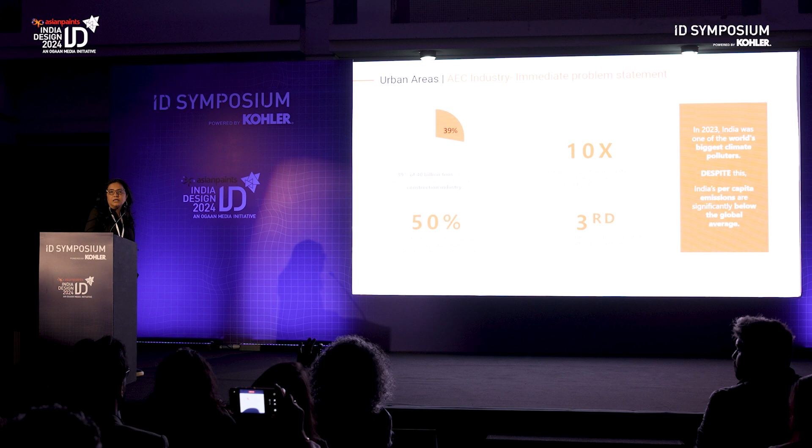For me, these things formed the thoughts that I've been having: what am I going to do with myself in the next 10 years? What is my role? So far, the role has been, and us in the construction industry have largely contributed to it, taking the global temperature post-industrialization up by 1 degree centigrade, where probably at 1.5 we'll all be devastated. And essentially, we talk about achieving net zero, but where are we? Where are we in this net zero conversation?

We all talk about energy intensity, that's embodied energy within the products we use. We talk about energy efficiency, but where are we? This is something for the last 10 years that I've been working on within the firm: sustainability, optimization, unique and livable. But really, given the enormity of the task in the 10 years to come, this is nothing. This is absolutely nothing.

So some of the things that in the last 2-3 years, especially since COVID, I've been talking about is energy which is metrics driven, not just to go one step ahead, but to actually prove to ourselves that we are heading to net zero. And talking about social inclusivity and sustainability, but is that enough?

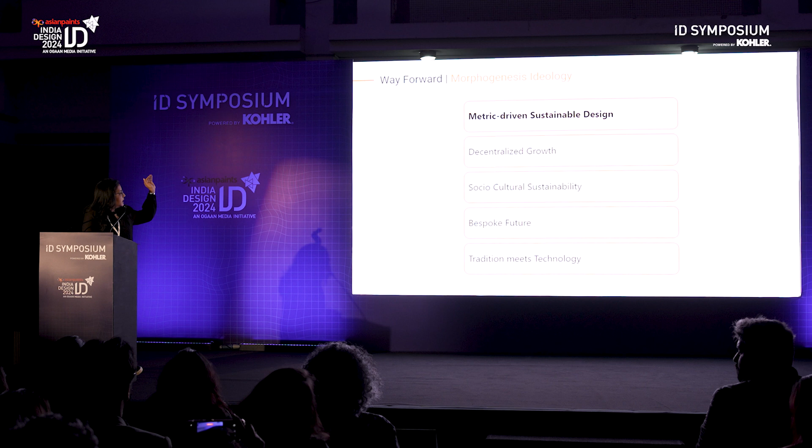So I want to talk about how I went into my own past, looked at 5 projects where I've practiced some of this, and I want to form, like I formed along with various people, the philosophy SOUL, which I worked on over these two decades: sustainability, optimization, unique and livable. Now, I don't as yet have an acronym, but I want to introduce to friends, colleagues, professors in the audience that this, I think, is the basis of the next 10 years for me. And this is the first time I'm going to talk about it. So the first is metric-driven sustainable design.

So I was fortunate to build this project, which is the world's largest office building during COVID. And in conversation with Amit again two weeks ago, I realized that if I could build 142 such buildings, then the entire building target of India for the next 10 years is done.

If one practice with about 16 architects could build a building using 50% of the energy that the best green targets allow for, of course 50% is also not good enough, it should be net zero. But if one practice can do this, just this room full of people can build all of India in a more sustainable way.

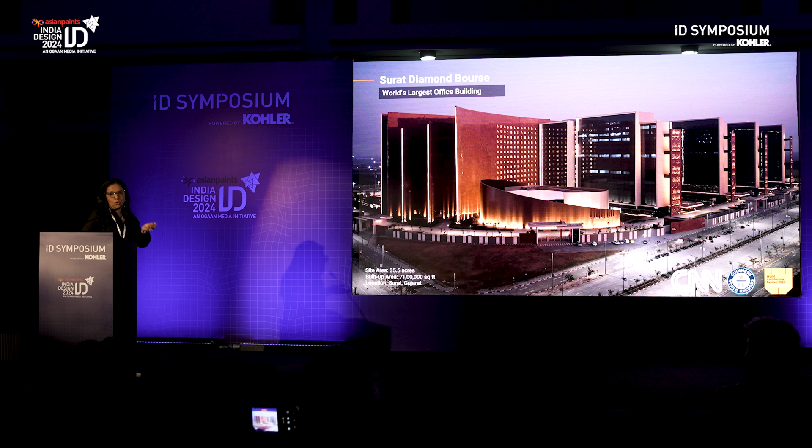So this project taught me about metrics-driven design because the budgets were so tight and the entire money was in the bank before the project started, and the vision was larger than life. We'd been working in the field of reducing energy, but we really had to reduce energy to actually meet the cost, leave alone a grand idea of going to net zero.

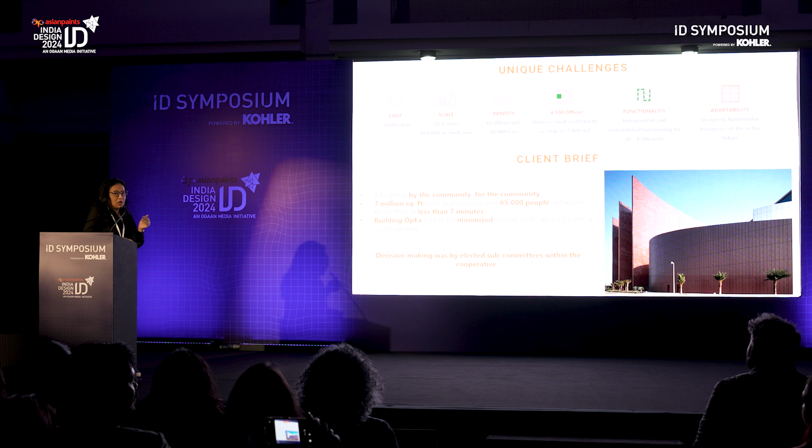But the building was not buildable if certain metrics were not achieved. This building is for 65,000 people who come into work every day. So all sorts of savings, including saving of human energy, which is calculating how 65,000 people get into a building every day in the first 15 minutes between 9 and 9:15.

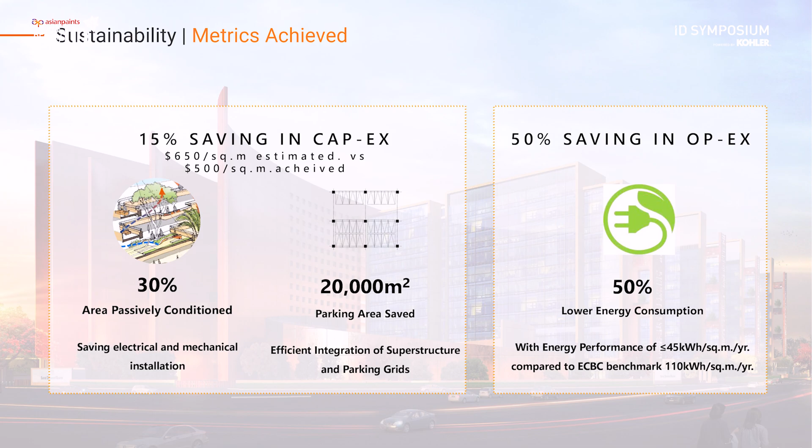And the only way to build this project was 15% saving in capital expenditure and 50% saving in operational expenditure. So energy performance was 45 kilowatt hour per square meter per year. That's what we achieved. This is less than 50% of the green standards which would be acceptable.

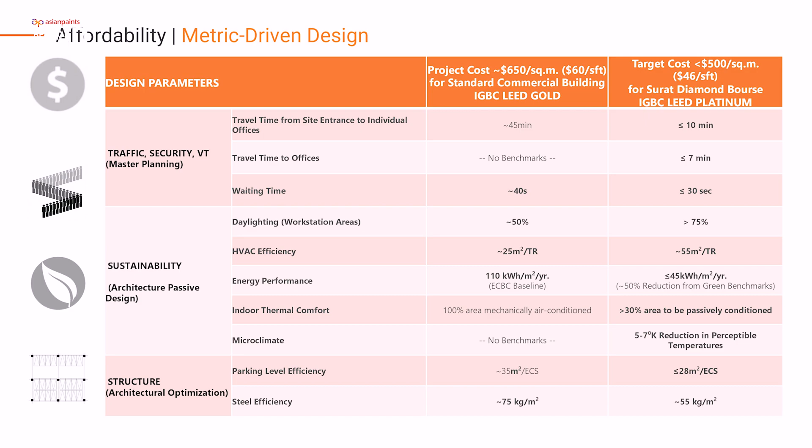So examining LEED Gold, which was the client mandate, examining LEED Platinum, even with that we would never achieve the cost of the project, so we had to go beyond that. So numbers were what helped us. Why I say metric-driven design? The numbers were decided first, the design came later.

And as the next decade is going to be about net zero, zero is a number. So I have reversed my design philosophy. It is number first. It's going to sound horrible, so don't just read it for just this one sentence that I'm going to say: for me, it's going to be a decade of number first, design follows.

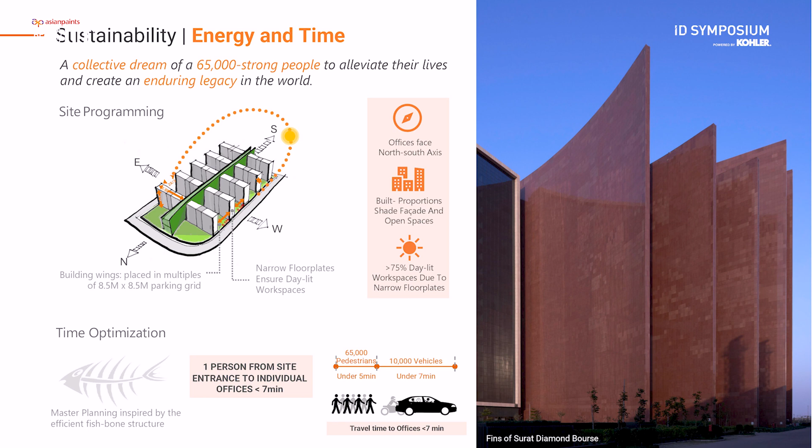So this was a collective dream of 65,000 strong people to alleviate their lives and create an enduring legacy for themselves in the world. And this is the project, and this project was designed numbers first.

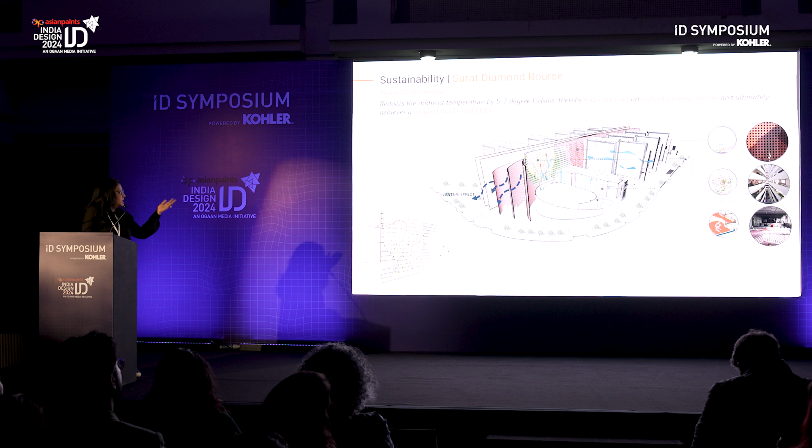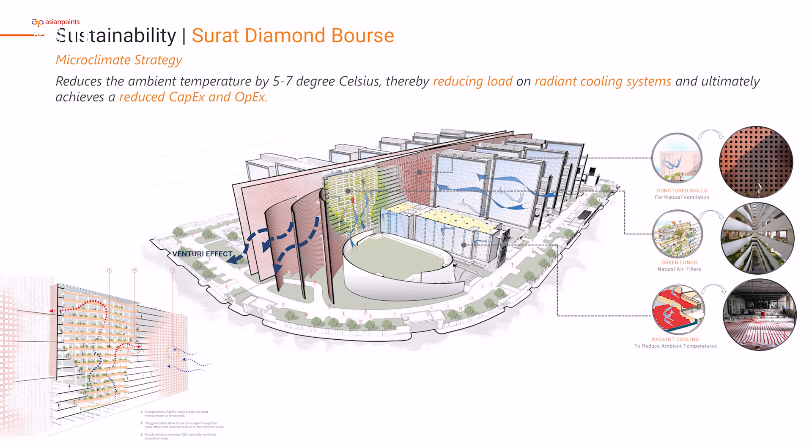Of course, the elementary principles of sustainability that we all studied through Koenigsberger in second year, and have developed over almost 3 decades of practice, all of those stay. So it's not that aesthetics disappears, passive design disappears, none of that disappears, but that by now is given. If I don't know that in 3 decades of practice, then too bad, that's really sad.

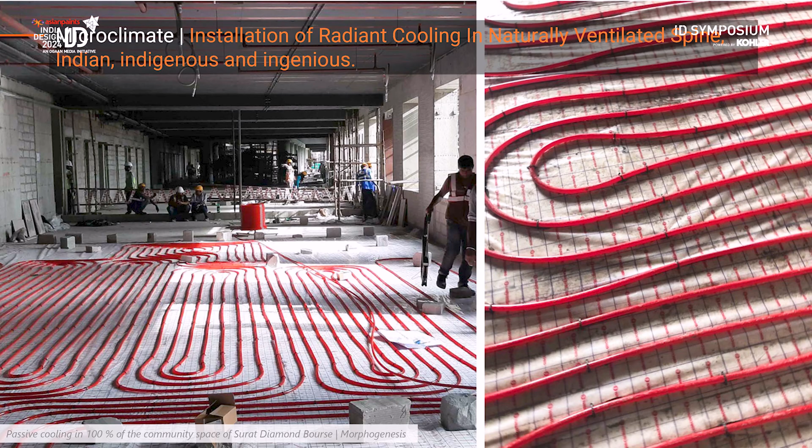So the new idea is numbers-driven design. So this is where innovation came in. It's Indian, it's indigenous, and it's ingenious, working together with the engineers.

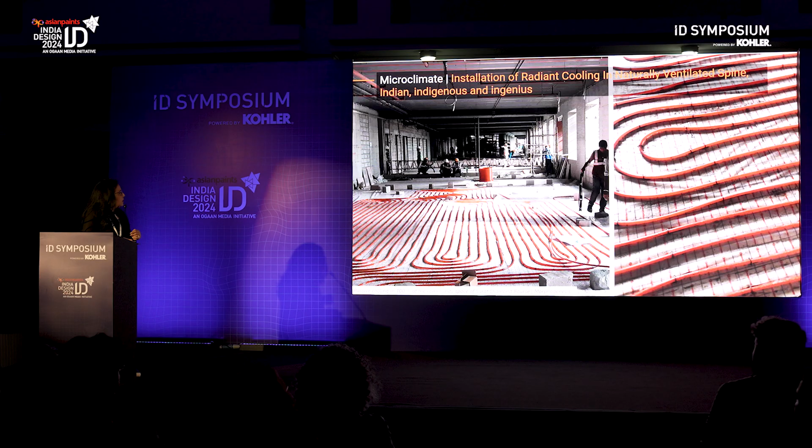Radiant cooling, so in such a large project, 42% of area, I think, is in circulation, and none of it is air-conditioned. All of it is radiant cooled. Radiant cooling had been introduced in Germany about 6-7 years ago, but very expensive to do here, till we made it here on site.

So these holes in the building, Jaali inspired, so reminding you, not forgetting design and not forgetting heritage. Jaali inspired, so the entire building is ventilated. None of these holes have any glass in it.

And when designing buildings to this scale, there's no corridors, they're only urban spaces. So this is internal urban spaces, internal gardens, internal spaces for people to move. This is the primary circulation of the project.

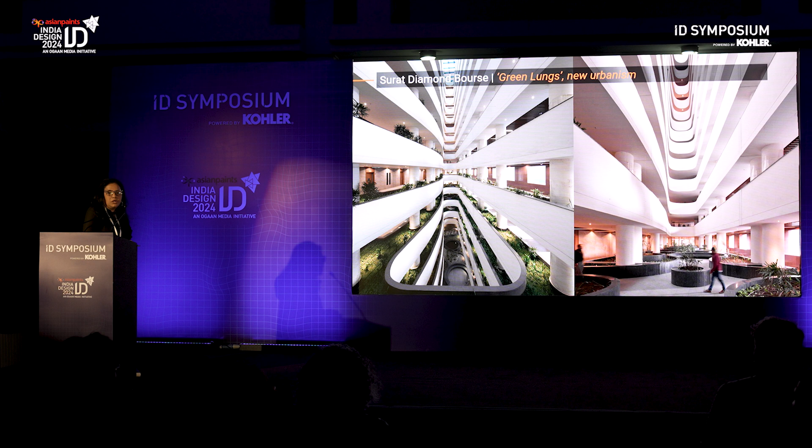The project as it stands finished and was inaugurated in December, a couple of months ago. Just some images to give you a sense of scale.

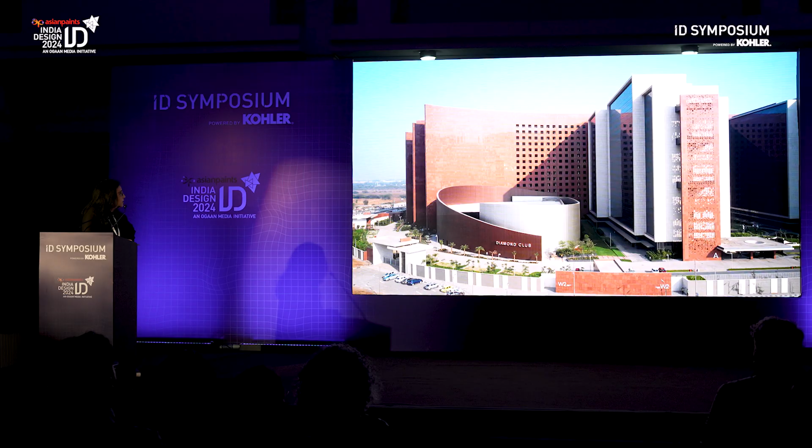Okay, now I go to a really small project. This idea happened again by building a building during COVID that never stopped construction because it was in the middle of a hill, or rather on top of a little hill that no one was bothered about. Had about 60 or 80 huts on the village, that's about it.

So this is the entire production facility for Forest Essentials. Most of us use some product or the other from there. And this building is completely off-grid and was built during COVID.

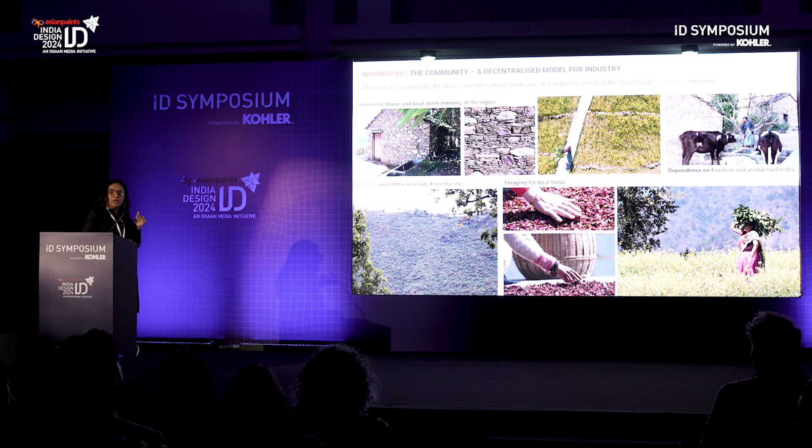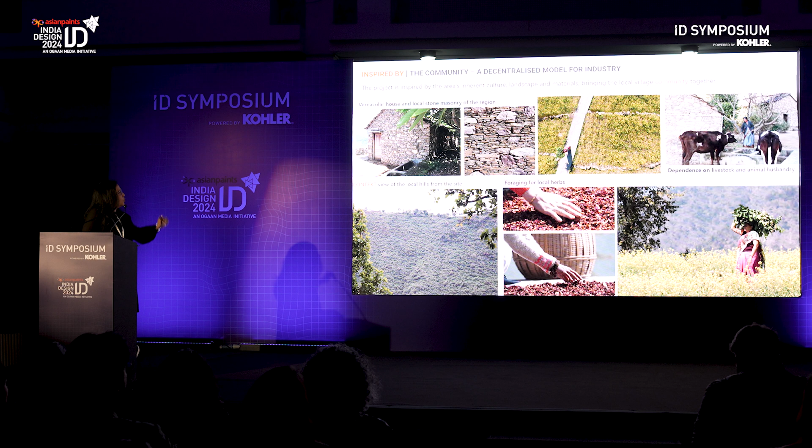What got me thinking was that this building never stopped being built, because when the few laborers who were there disappeared, people from the villages built it instead, since most of them had employment in this factory in some form, direct or indirect. We used local dhaji-style stonework so that they could build it.

Then I realized that if a very successful company can continue operations in an off-grid building and get it built by just the people around, people who seriously walk to work, then maybe we need to question the idea of the urbanization figures I've just shared. Why doesn't work just happen? Why don't we come up with a more decentralized urban plan? I know in India it's mostly policymakers who do that, but this is a conversation I've been having with myself.

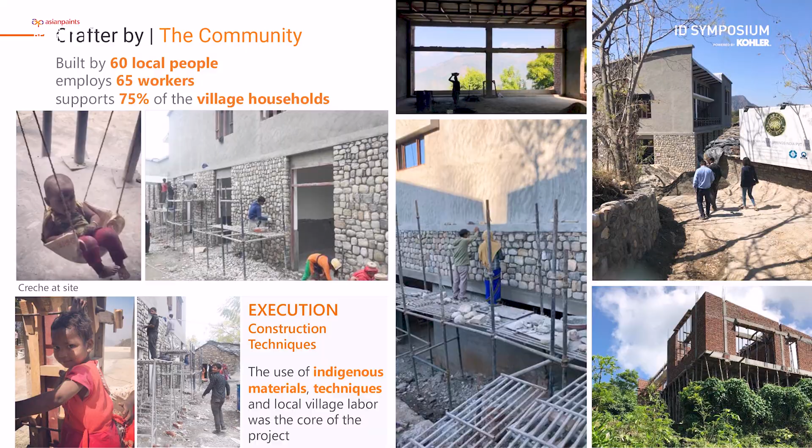So it's an energy-positive building, just using solar panels. It also gets used as a school in the evening because it's energy positive, and in the day it does production. In the evening, because a lot of the huts don't have the same conditions to study, many of them study here. Indigenous materials and techniques are used, and 100% of the products sold in 80 countries can be produced in this condition. Because they're invested in by a major international brand, Estee Lauder, all the conditions required for international ratings of this kind of product are met here.

So it is really a building for the people, by the people, and built by the people, and on this hill of Lodzi, every household has somebody who comes here to work, directly or indirectly. This is my next preoccupation, or will be for the next decade: decentralized growth. If such successful companies can happen this way, then why not a lot more?

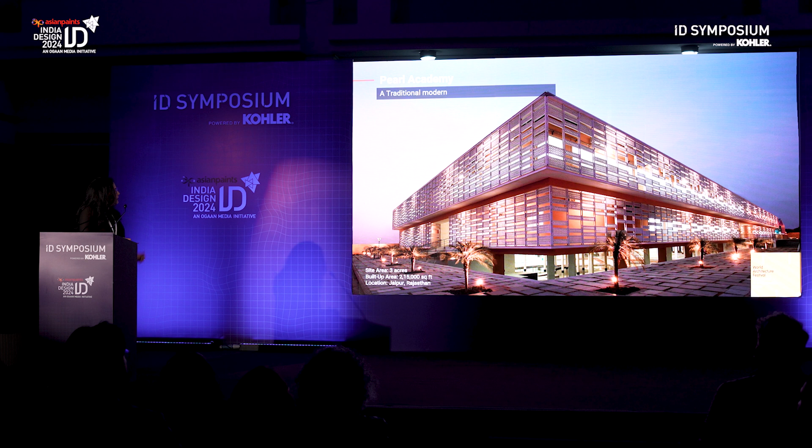Third, socio-cultural sustainability is my next conversation. This started in 2008 with a project called Pearl Academy of Fashion, built outside Jaipur. This conversation happened again because of a lack of budget, so every little technique that could save money was looked at. I think Shruti, sitting here in the audience in the front row, worked on this project.

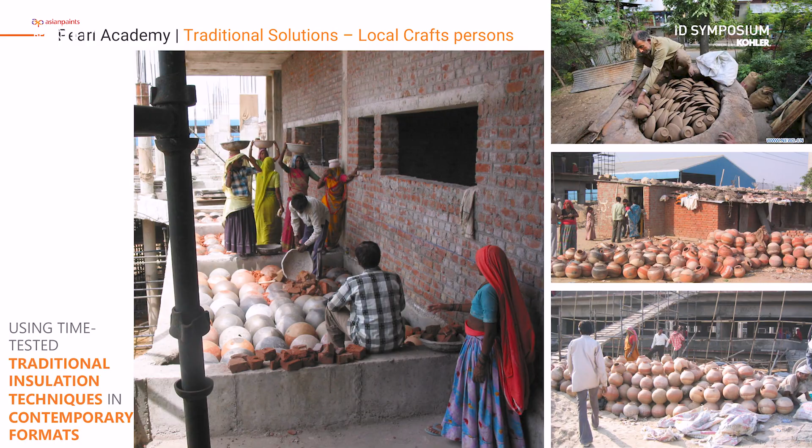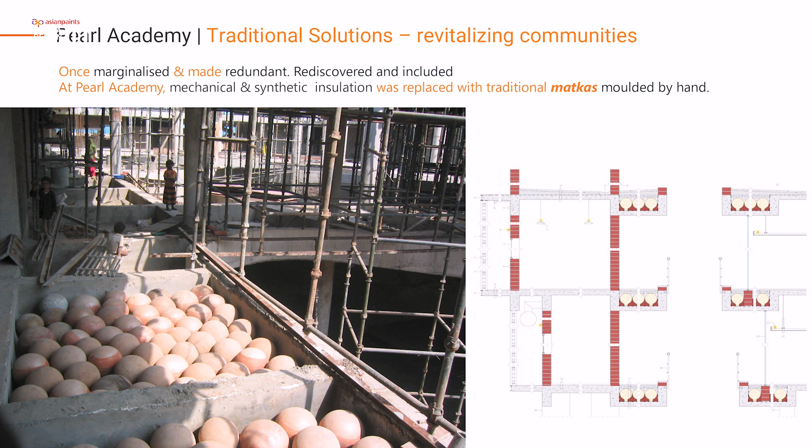So this involved potters making pots, using them for insulation and also to create flat soffits by inverting the beam and filling it up with these pots. You can see the detail, and you can see the work in progress.

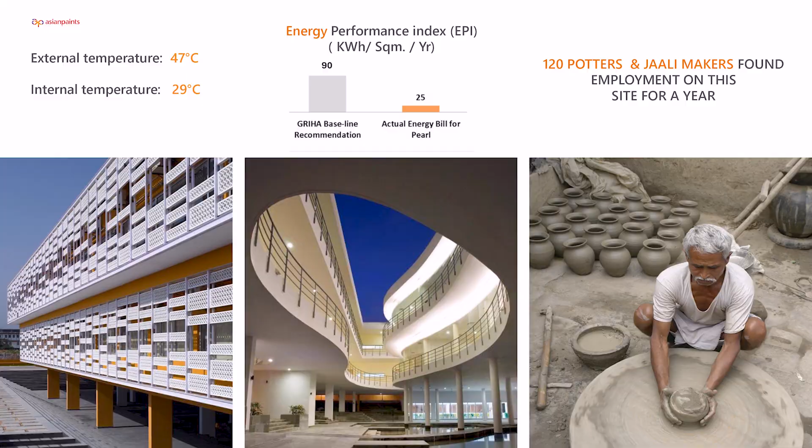A few years later, I called the client back and asked about that little colony of potters we set up, how many were there. That's the kind of rough information I got. I believe now they go from site to site using the same technique a lot in other institutional buildings in Jaipur. So this was a Rajasthani technique: forgotten, rediscovered, and repopularized.

And it's cheap and effective: 30 rupees per square foot became 1 rupee 25 paisa per square foot. So for me, it's about the cost of building and it's about inclusivity, because we are going to be shifting all these people from rural areas to cities in the next 10 years. Some part of what they bring has to be brought into what is being built. Otherwise, there will be a mind-numbing amount of zero-skill people around us if we rob them of every skill they have.

So this is an old project, but the conversation became alive for me more recently about the people who helped with this. Earlier, it was always about the architecture, the jali, the matka, but now it's about the people. Because all these people who are going to move into the cities, we need to find ways in our architecture to enrich the architecture using their skill, not to do social service.

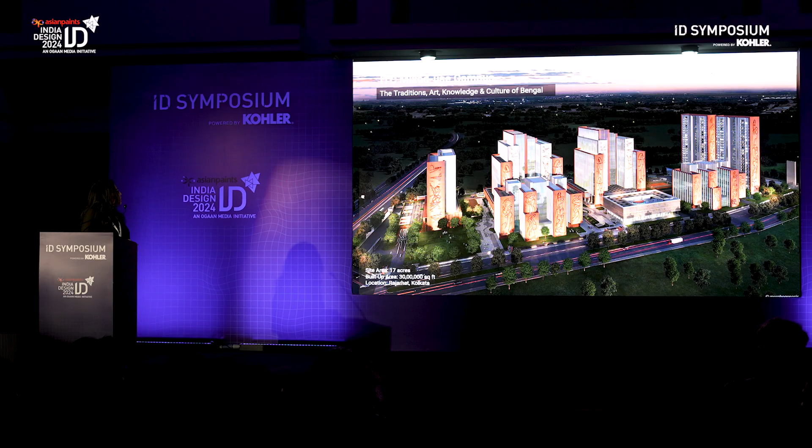Fourth, for lack of a better word, I'm calling it bespoke future. I'm sure over the next few conversations it will improve the taxonomy I'm using. So this is a project called the ITC Mixed Use Campus; now they call it Sanskriti Campus. This is half built, outside Kolkata. This was a west-facing facade, so as per passive design principles, it had to be a blank facade. So in ideation, it became blank canvases.

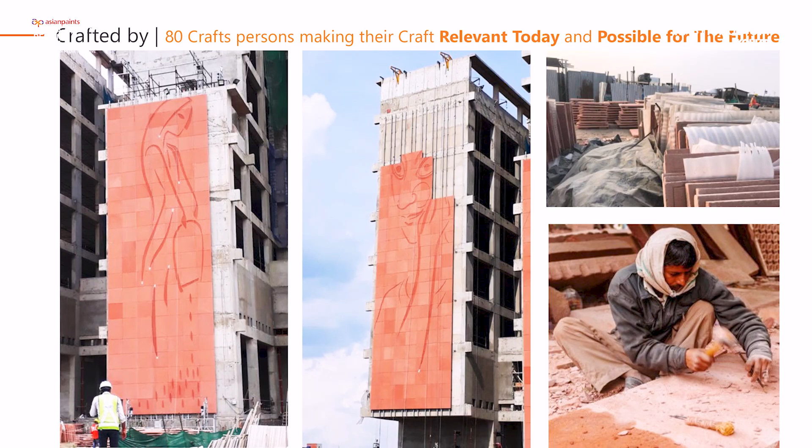And this is the project in construction. So this is where 80 craftspersons, their craft is being made relevant today and possible for the future.

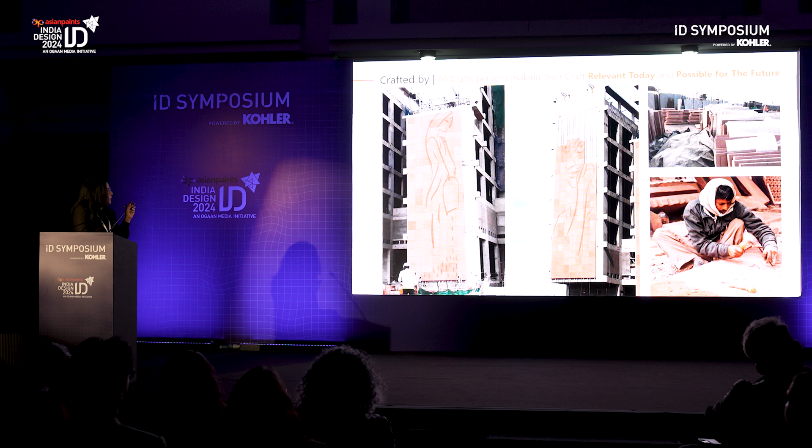It's being made relevant because certain very tedious tasks, which cost labor, are labor intensive and become very expensive, time intensive, and therefore not possible because we are not in the business of making Taj Mahal today. So half and half, let's share the burden. The craft is made relevant today, but the base cutting, the first cut, happens with CNC, and the style of cladding happens with drywalling. And the fine art on it, the depth, the color, the resin filling, the texturization happens by hand.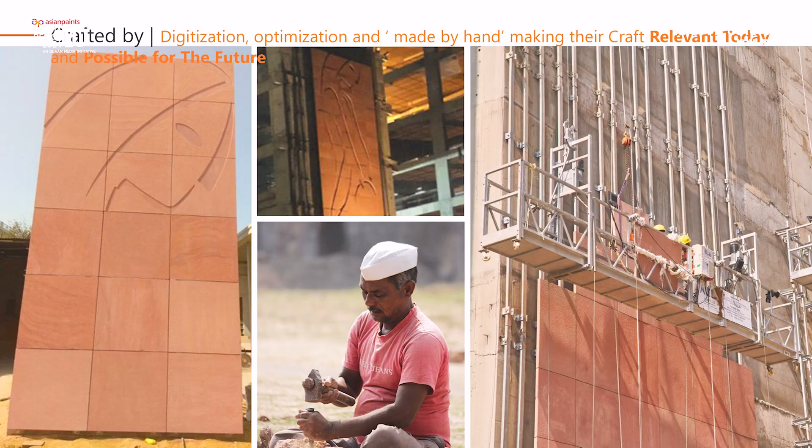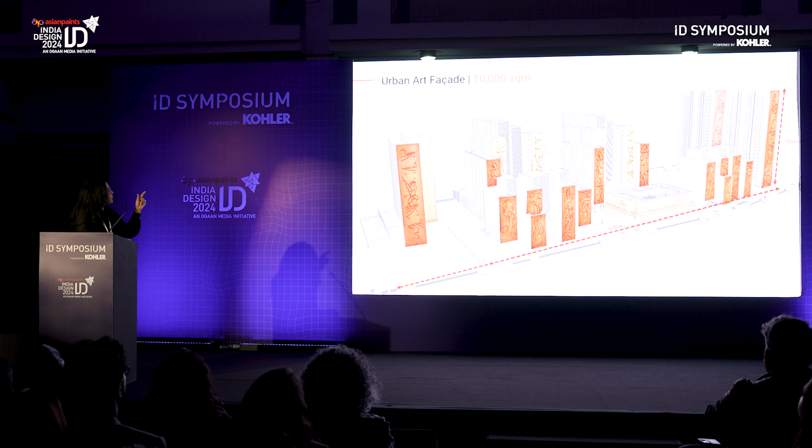About the first 3 buildings are done, but that's what it will be finally when that happens. There will be 28 facades, the maximum being 95 meters tall, showcasing works of artists who were paid to draw up designs, and have stayed employed for the last 5 years because they build very slowly in Kolkata, and it will probably keep them employed for at least another 5.

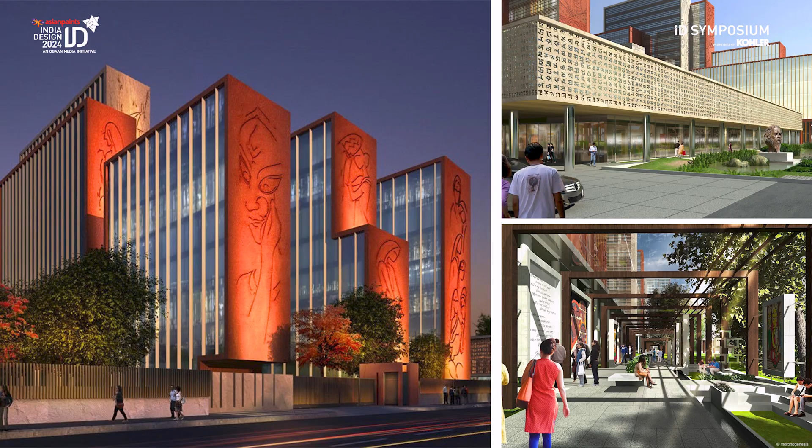And the last, tradition meets technology. This was a project finished just 2 or 3 months before COVID hit us. It's the corporate office for Zydus. Again, I think west-facing projects give you a lot of opportunity for sculptural work. So this is west-facing on the highway, and obviously, you blank it out if you can, and that's what we did. We tried to create this fortress which won't let the sun in.

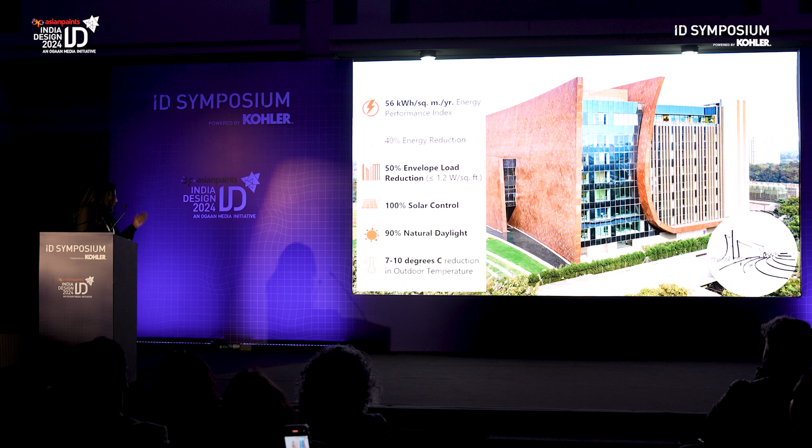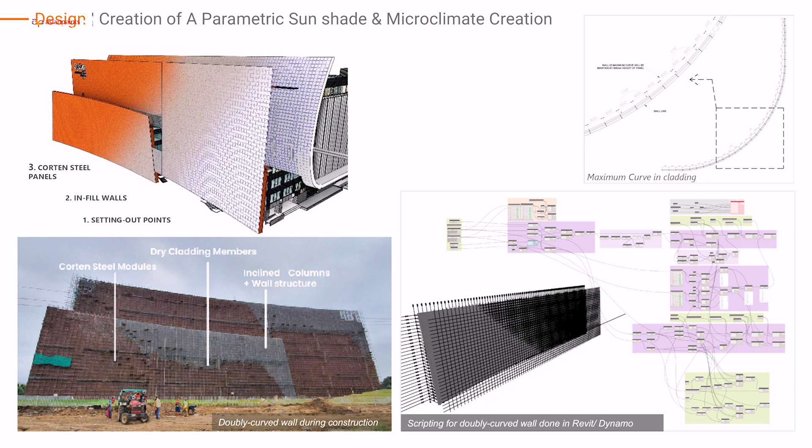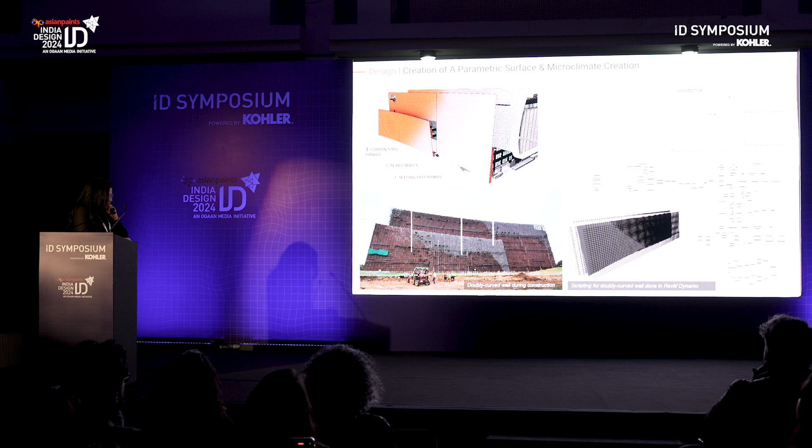By doing that, all the energy metrics, which today have gained more importance in my being, so a lot of reduction of energy intake into the building was already done through that process. But I think what is very exciting about this surface is some parametric software work done by some very cool young architects. This kind of doubly curving, multiply curving shape, with 1,700 different points, was created. Whilst it was digitally created, how to build it was another thing altogether.

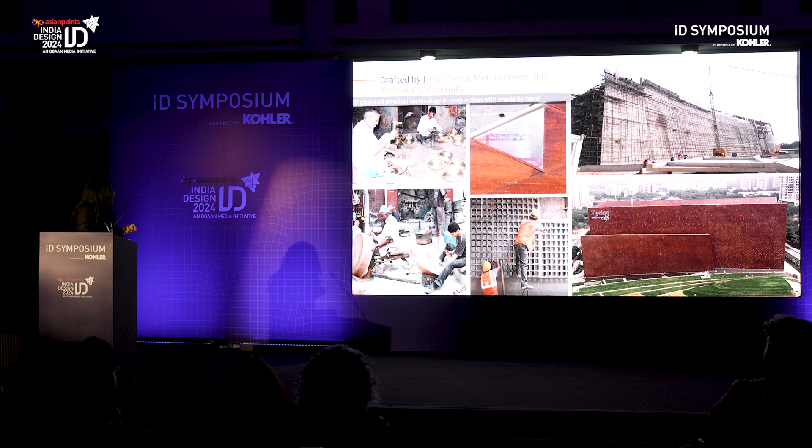Using some partially flexible shuttering, the wall was put together, but the cladding was hand done because we just couldn't figure out a system. We had these points, we cast the concrete, which was kind of 10-20% off, but mostly managed to get the curve. But how do we get the corten steel onto it where every trapezoid was different? So this is the building, some cladding inside, some outside.

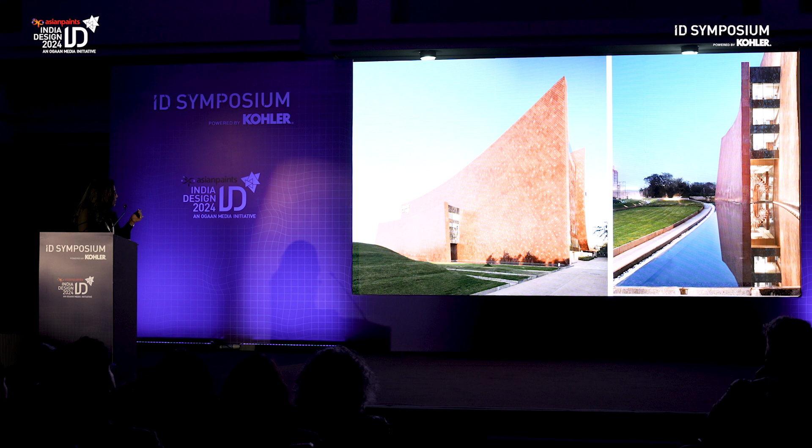Even the prismatic glass was actually inspired by traditional Gujarati architecture. This is actual craftsmen working on site, but also inspiration from another craft, which is the Bhunga craft. When the sun moves, the building constantly looks like it's in movement because this is dichroic film on glass, and hence has the same identity-making quality that mirror work on Bhunga huts have.

So this is my last slide. This is the target, and as our Prime Minister has declared that we'll get net zero by 2070, it kind of baffles me. We'll build 1 billion in 10 years, and then I suppose we'll build another 1 billion in the next 10, and another 1 billion, if not more. And if we don't build it net zero today, how will we be net zero in 2070? So how can a target be so far away that it gives us a license to do any nonsense we feel like till then? It's not possible. We have to be building net zero yesterday.

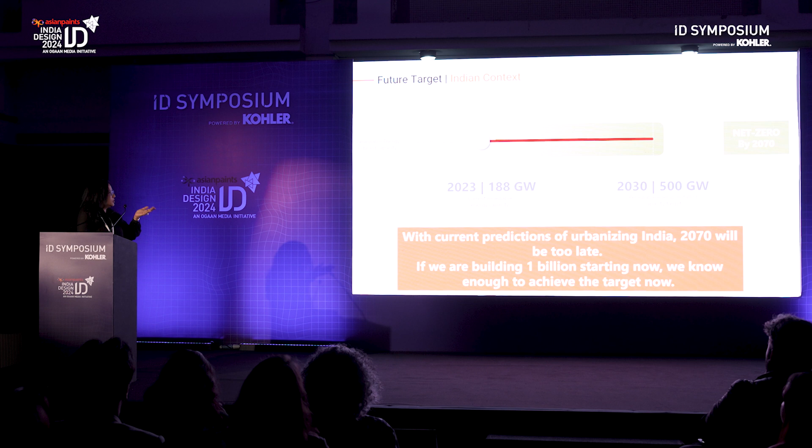And imagine one more thing: I'm very proud that Surat Diamond Bourse has achieved an EPI of 45. But imagine if everybody just built 45 EPI buildings. The math doesn't add up to me. Then how does it become net zero? How does it become a net zero future? With current predictions of urbanization, I think 2070 is an absolutely incorrect figure. And if we are building 1 billion starting now, simple math says to me that this target is for now, it's not for 2070.

So I'd just like to leave the room by saying that I'm going to try better. 45 is just too much energy. 45 EPI is too much energy. That's the best I've done so far, and it's not good enough. That's what I'm going to leave this room with, and that's what my conversation with myself over the next decade will be. Thank you.